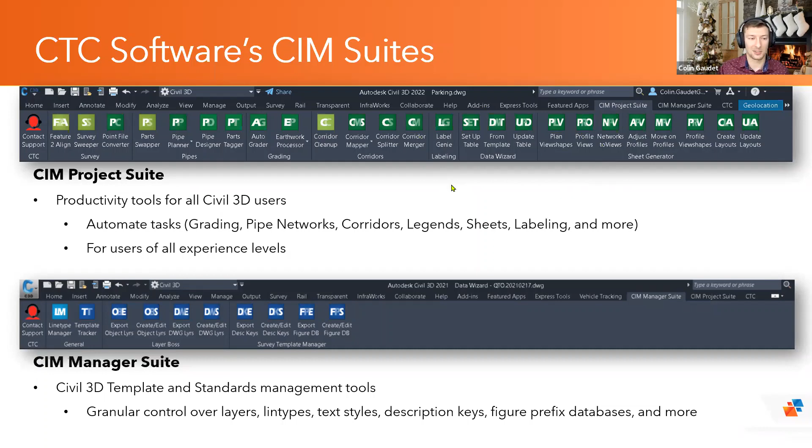There's nothing proprietary about them. Other people can still use the drawings that you have used CTC tools on. They just have to do it slower. All that to say, let's get into some corridor target mapping.

And when we're talking about corridors, I always like to start off at ground zero, talking about corridors as a whole. What creates them? Well, we obviously need a baseline, both vertical and horizontal. So we've got our horizontal baseline being an alignment. Then we've got our vertical baseline being ideally a design profile. And then we've got a typical cross section that's going to run down those in different regions. And that typical cross section is your assembly.

Now, what happens when you have an assembly that doesn't quite fit in certain areas? Well, we end up having to create another assembly that has a sidewalk for these 20 meters or has a driveway for these 3 meters or whatever the case. And we end up running into these issues where we develop a ton of different assemblies. Now, this is a fairly simplistic way to do it. There are more efficient ways to create assemblies because this offers pretty clunky transitions between all of these regions, and you're left with a corridor that's got, I don't know, north of 15 to 20 regions. It drastically decreases the performance of your drawing, having that many regions and everything else.

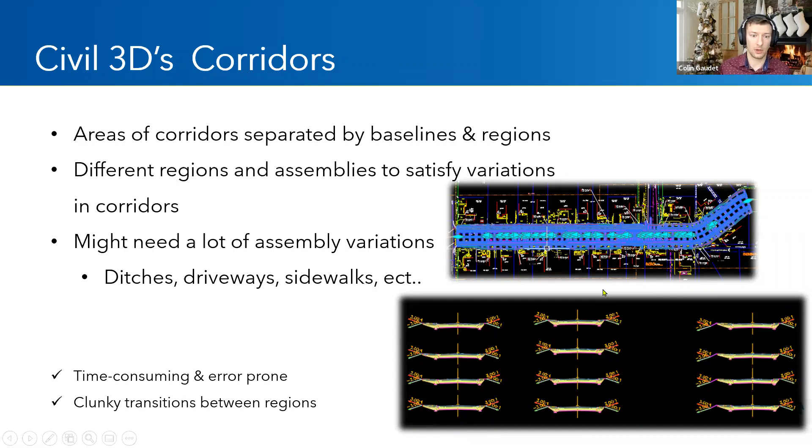So alternatively, we have these conditional subassemblies. There's two different types. There are the cut or fill, dictating what happens in a cut situation when you are sitting below the existing ground, or what happens in a fill situation when your baseline is sitting above the existing ground. That's one conditional assembly. The other one is a horizontal target, a found or not found horizontal target assembly, and that's the one that we're going to kind of manipulate today.

What these simple subassemblies allow you to do is consolidate a variety of these different assemblies that we have here for the different situations into one single assembly that's got a couple different branches with different options involved in it. So that's what we're going to try and work with today.

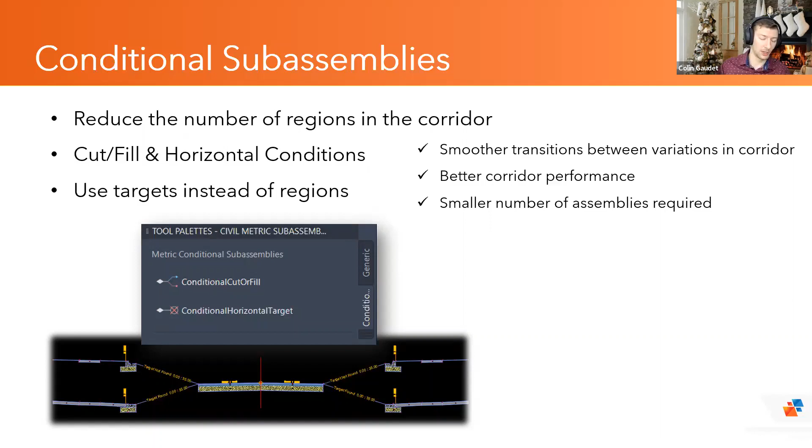Getting into it though, the other kind of sore point when it gets to corridors as a whole is getting into the targets. So your targeting can get pretty clunky because it's 3 dialog boxes deep through your corridor properties. You can assign things by individual layers or individual selection, but those layers don't remain dynamic. So if other stuff gets added to those layers, Civil 3D natively doesn't recognize that more things need to be targeted. So it's still fairly time consuming, and we have to go and do updates and iterations manually.

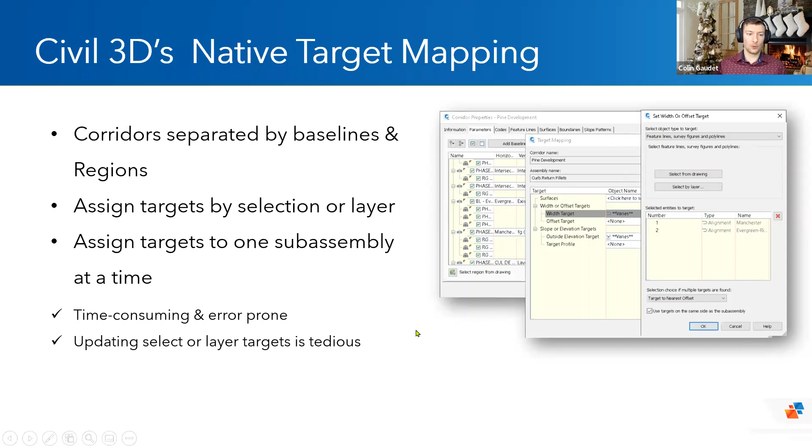For corridor target mapping, what CTC's got instead is our Corridor Mapper tool. So this guy right in the middle here. We'll take a look at the corridor splitter and merger and corridor cleanup, but those are fairly simple and straightforward tools that you can't make an entire webinar about. What Corridor Mapper does is it allows you to get all of your targeting information in one single dialog box.

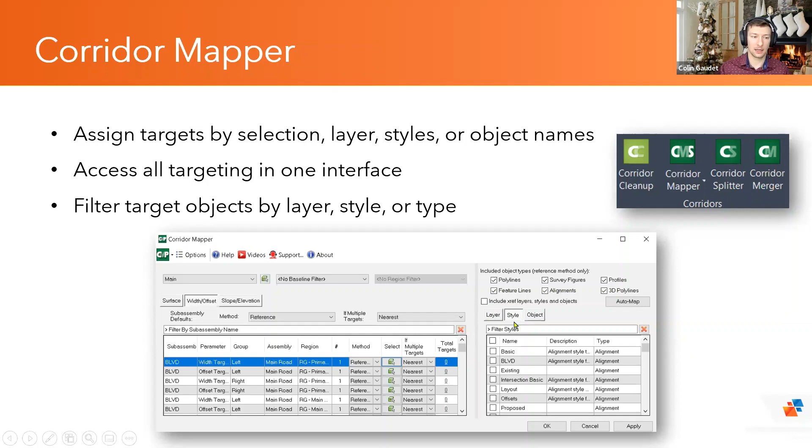We can filter with a variety more options, including filtering by styles and dynamic layer targeting and things like that. We can even target XREFs, and we'll talk about how we can actually mirror the targeting of another subassembly that's in our corridor.

Now, all of this is available with the CIM Project Suite. It's available for the last 5 versions. So as I switch back over into Civil 3D, I could be using version 2018, and I would still have access to this tool set and have the ability to use all of these things in here.

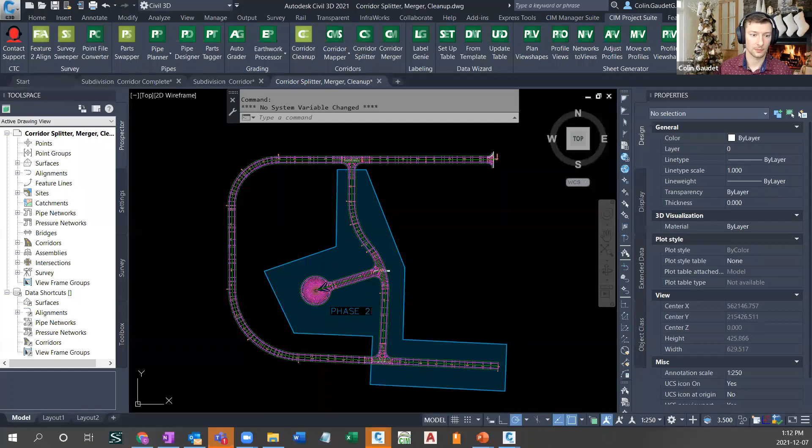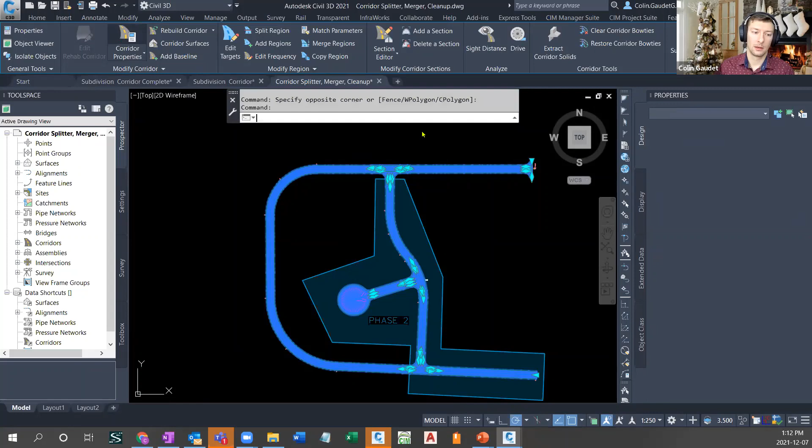Now in Civil 3D, we're going to get into corridor targeting. This is just a quick example of a corridor that's already targeted, because I'd like to show you really quickly the splitter and merger. This is all one corridor currently. If I get into the corridor properties, this could be one huge mess. And I don't want to have to reproduce this if we realize that, hey, we ran out of budget this year and this portion is actually going to be completed in phase 2 next year.

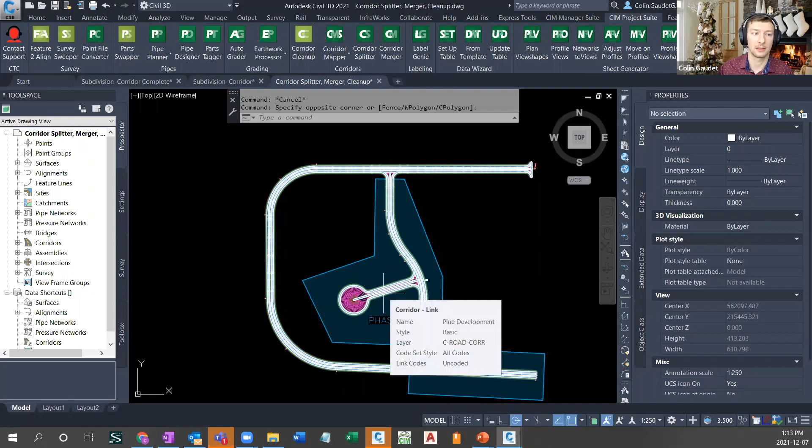Well, instead of having to delete and then recreate this in a separate corridor for establishing quantities and surfaces and things like that, we can simply use corridor splitter. You select corridor splitter. It asks you to pick a corridor and then gives you options to either split off individual, or I can press enter and I get an entire list of all of the different baselines and regions.

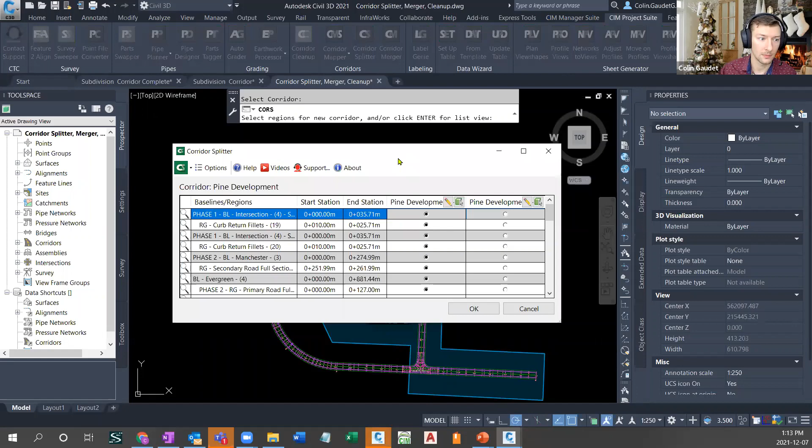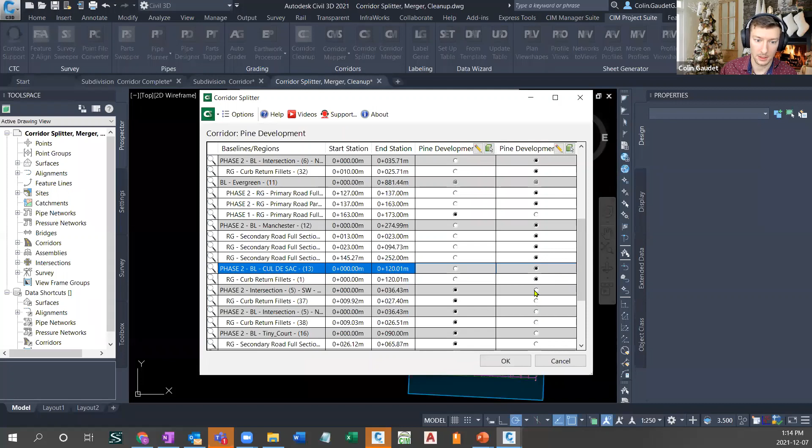And with that, I'm able to come in here and split off phase 2. Luckily I have most of these named right here, so I can scroll down and divvy this up via regions. It's going to copy baselines. It's going to copy and maintain all of the dependent objects. When I'm talking about dependent objects, we're talking about surfaces that are created from this or other things like that. Once you've separated all of this out, we can name each one of these, click OK, and it can separate all of this out for us.

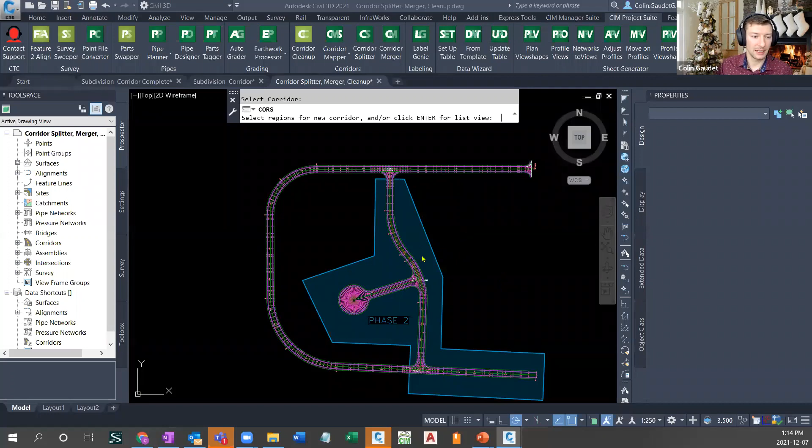Merger does the exact opposite. We pick 2 corridors, and it will merge those dependent objects as well. It'll take a couple seconds, but this is something that's not available in native Civil 3D. We can't simply split a corridor into 2 separate corridors. Now, if I take a look, I've got 2 corridor surfaces for 1 and 2, and everything already in there.

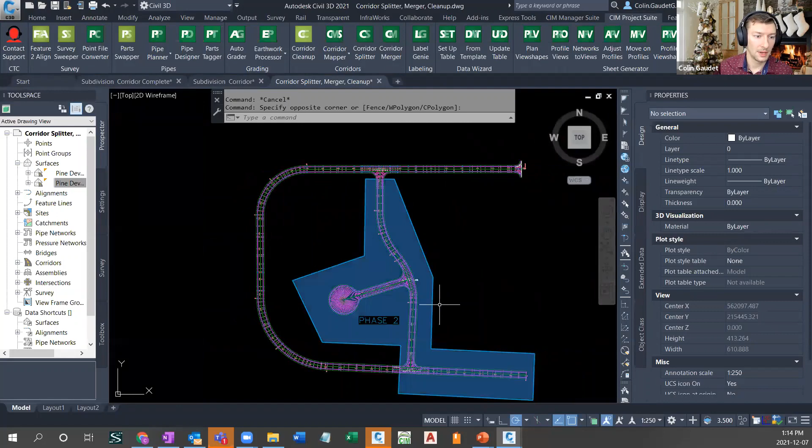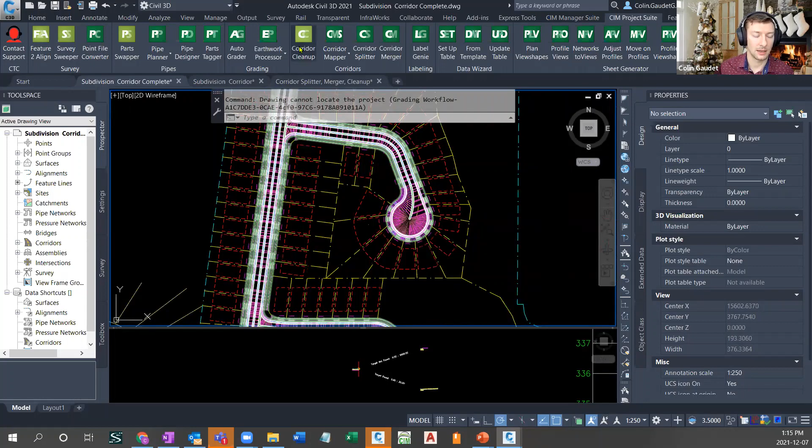The other side of this is sometimes these get pretty cluttered. For example, this is what we're going to end up creating by the end of this: we're going to use this subdivision and create all of this out. Sometimes maybe we don't know what all of this targeting is happening in here, and we'd rather just start from scratch and reestablish everything on our own. Corridor cleanup allows you to do that.

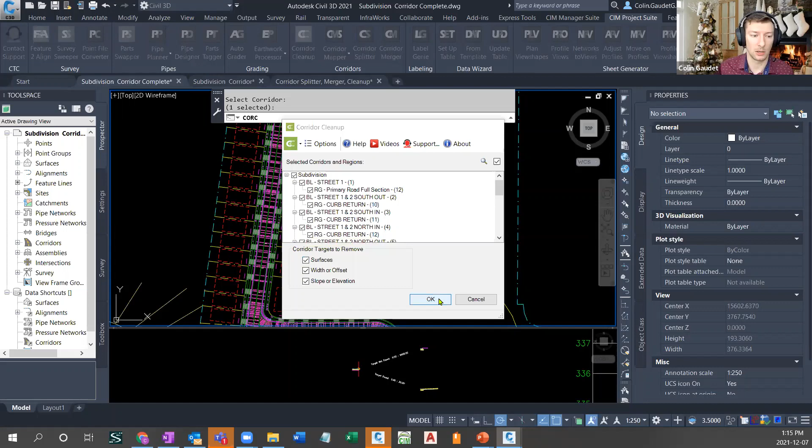Select a corridor, and I call this kind of the nuke button on all of the targeting. You're able to specify specific regions or baselines to remove targeting from, or specific targets altogether, be it the slope and elevations versus the width and offsets or surfaces. Let's just nuke it all and see what happens here. And we can eliminate all of that targeting in there.

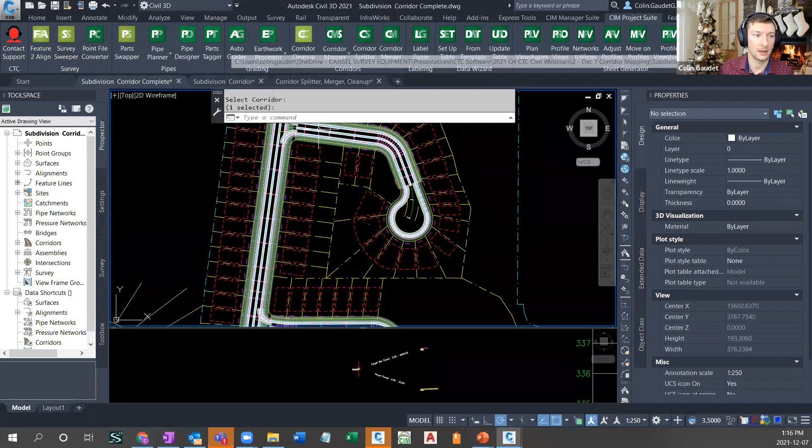Now, I'm not saying this is something everybody needs every single day. That's why it's a lighter green colored tool, meaning that this one's actually free. You don't have to purchase the suite. It sticks around after your trial runs out, and you get to keep that tool, as well as the part swapper tool and a couple little survey unique tools. But it nukes all of the targeting in my corridor.

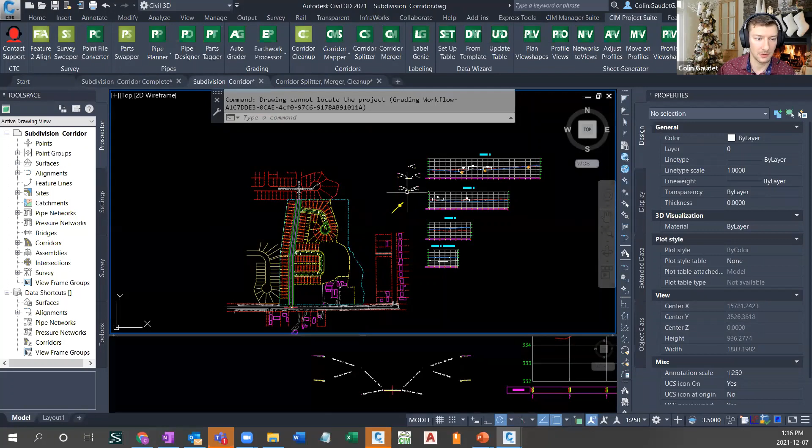Now, that was the completed version. Let's jump in here and take a look at what we're going to create. We're going to develop one corridor for this entire 3-street subdivision using only 3 assemblies. If I zoom in here, I could have done this with simply 2 assemblies. All I need is a curb return assembly and a road assembly, because the only difference between these two is the lane width right here.

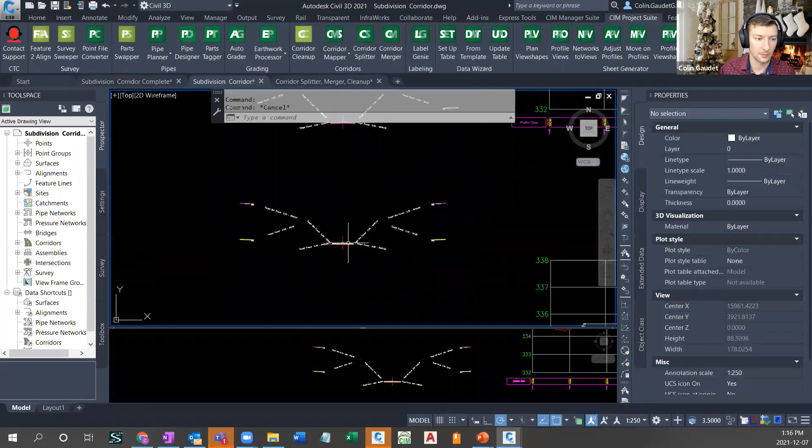Oops. This one here has a 4.5 lane width, and this one here has a 4.75, I believe. Oh, actually, I think it's the sidewalk that's different. My bad. But we're still able to use targeting to stretch those out slightly differently.

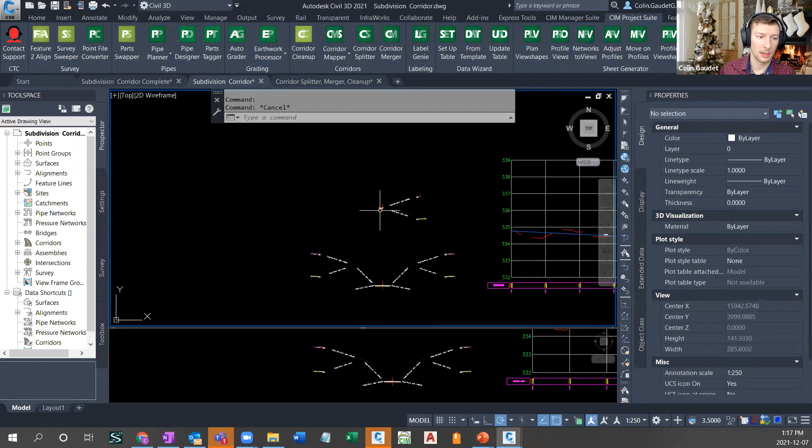Now, if I zoom in on this assembly, I've got these conditional subassemblies, and if I grab them, one point that I always like to hammer home is organization when it comes to your assemblies, your corridors, and all of this stuff. Everything Civil 3D really, organization is paramount. So I didn't just drop these in here as conditional horizontal subassembly. I named them with the intention of what I'm looking for here.

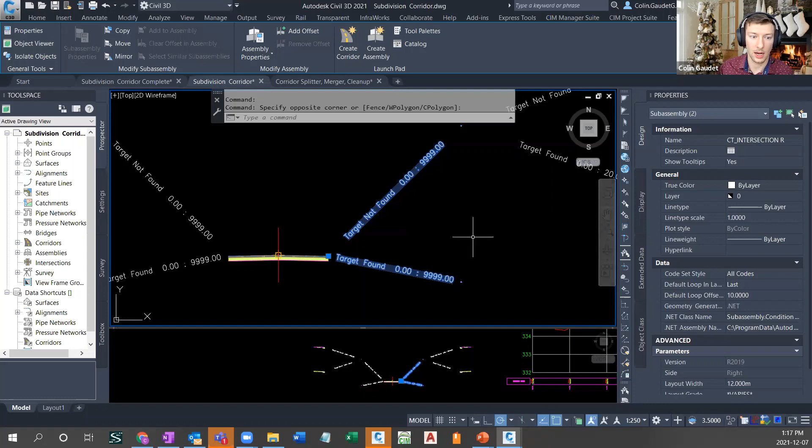So this is my corridor target, CT, and I'm looking for an intersection. So I'm able to use this for my intersections. If I find a simple polyline, and actually I've got this guy down here. If I find a simple polyline like this, it's going to remove the curb and the sidewalk and everything and allow me to develop an intersection in there.

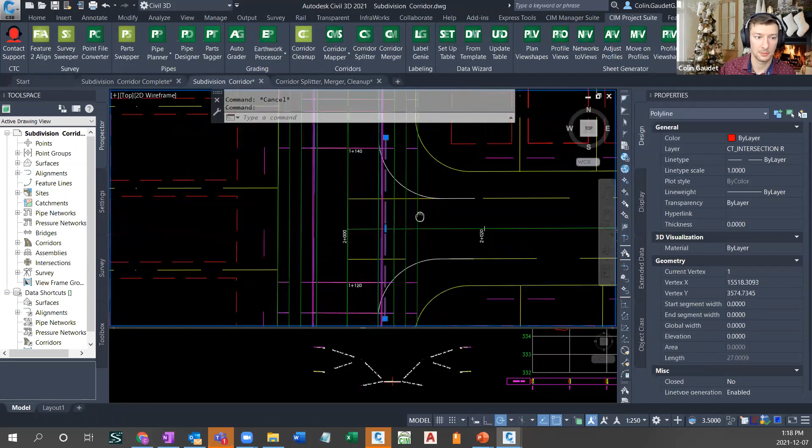Same thing here. If it doesn't find that, then it's looking for the next thing. Target not found, target found. And in this case, I've named it again. We're looking for driveways. So it's actually looking for, on the right side, these simple little driveway polylines dictating that I'm going to need a drop curb and things like that.

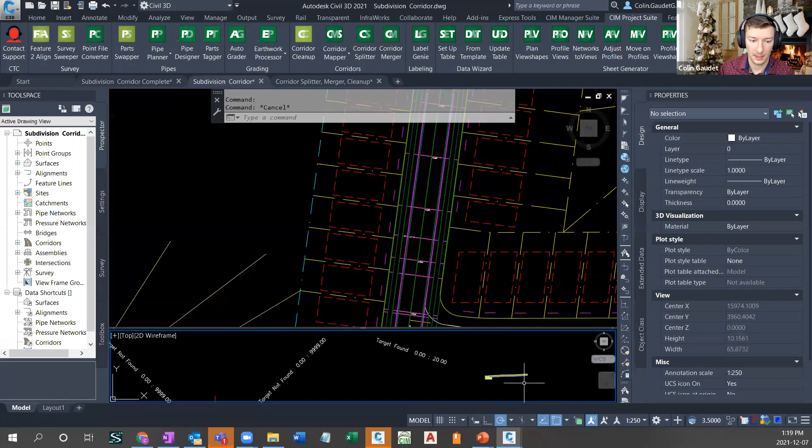And then based on what's happening in each one of these, you're going to end up with a different scenario. Think of this as kind of branches of possibilities in this assembly. If there isn't an intersection, but there is a driveway, I'm going to be left with a drop curb, an apron carrying through. If there isn't an intersection and there isn't a driveway, I'm going to be left with a full curb, a boulevard, and a sidewalk.

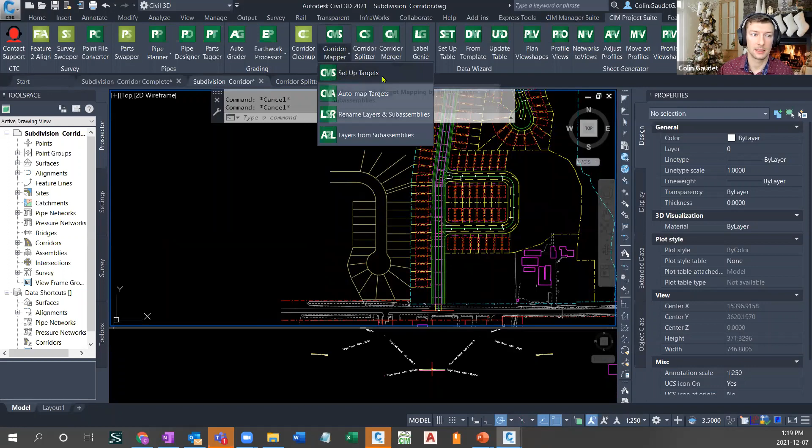So let's take a look at some of this. That's all native Civil 3D right now. What we're going to do is use some native tools to manipulate corridors and develop regions, but all of our targeting is going to happen inside of the setup targets for Corridor Mapper. Let's open that up and we'll start to apply targets to this very first baseline and region for the corridor. So just to save some time, I've added that in here, and I've developed some offset alignments and things like that.

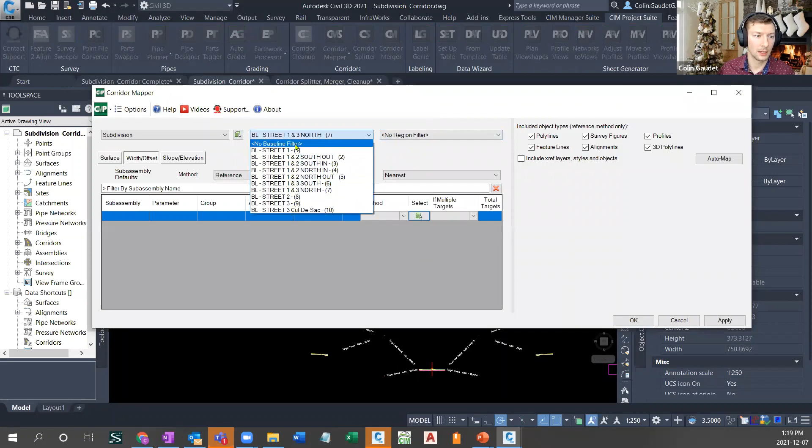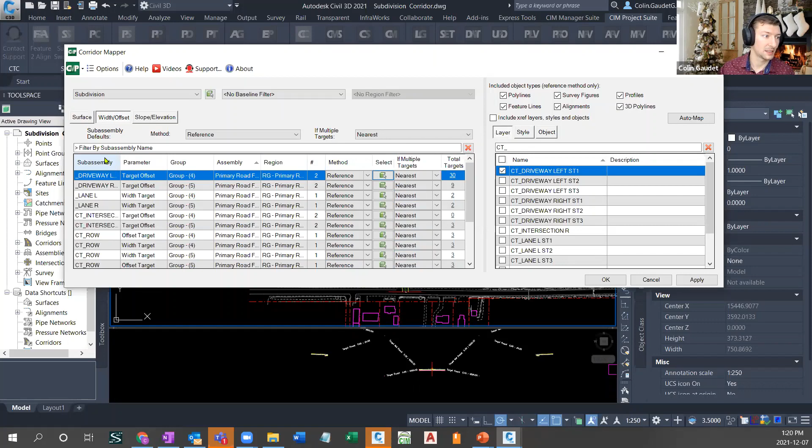Now, in Corridor Mapper, we have the ability to pick the different corridors and then divide up what we're looking for in terms of targets based off of surfaces, width and offset, or slope and elevation. And within here, I can refine this search based off of the different subassemblies, the different baselines that I'd like, and the regions if I needed to as well. But remember, the goal is to reduce the number of regions using these horizontal conditional subassemblies.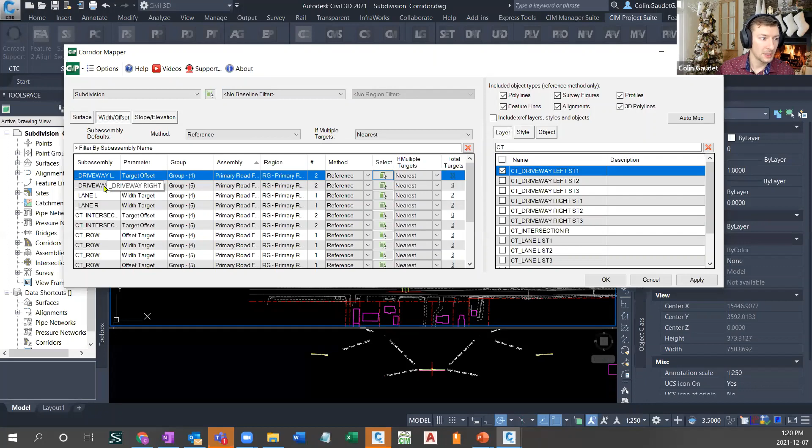Now, I've actually mapped some of this out already on this first initial one. So with one single region in here, I've taken my driveway left and my driveway right, and we can see that I've actually grabbed these via layer. So I've selected a layer. I can also filter out those layers using my filtering options here. And it gives me the option to pick whether I want polylines, feature lines, alignments, 3D polylines, or all of the above.

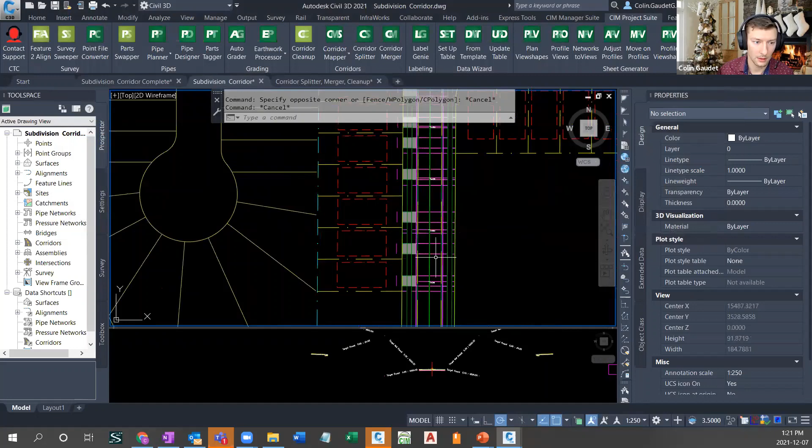So I've filtered all of this out here. Let's click OK to start. And just like that, it's already found 58. And I know this isn't that impressive because this is already baked in. But what we're going to do is develop even more on top of this. So let's zoom in and take a look here. We've got some drop curbs. It's recognized there's an intersection over here using the intersection polylines. And it's also grabbed some more intersections here.

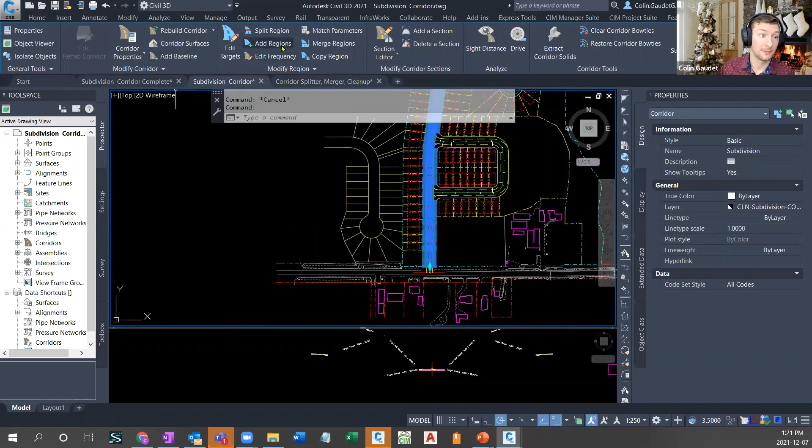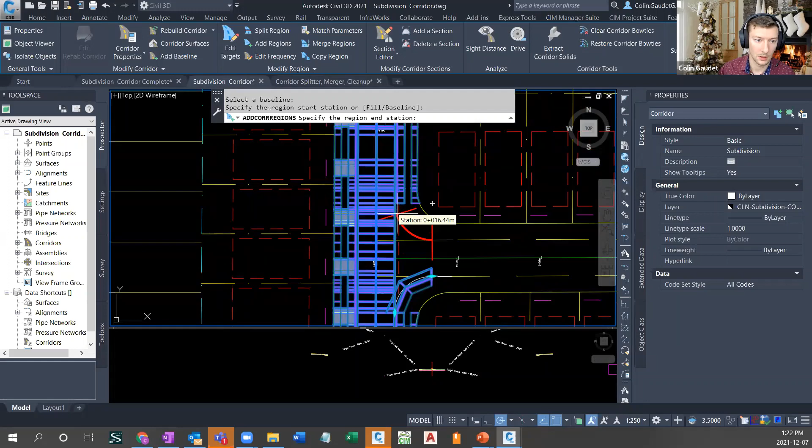So let's maybe add some baselines to this corridor and get a little bit more efficient here. Well, actually, we've added the baselines already for time's sake. Let's add some regions. So I'll come in here and select this region and develop a curb return right here. Now it gives you the option to do targeting. We're going to do all of our targeting inside of Corridor Mapper. There we go. We've added 2 there.

Just going to click enter and then enter to re-execute. Pick my baseline, pick the starting point, and pick the ending point of that region. And I've already got my curb return assembly picked. Select one, the start of the curb return, snap to the end of the curb return, and keep going.

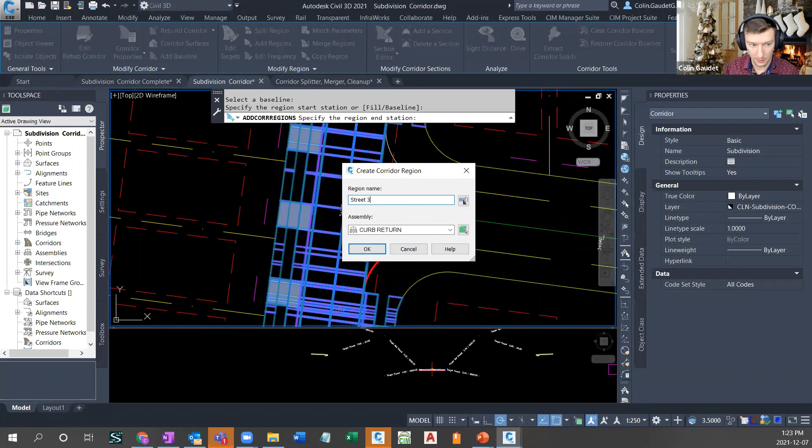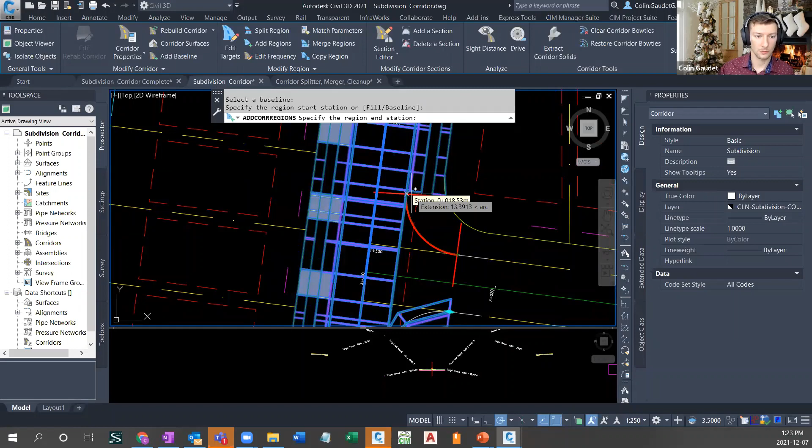And we'll do a couple more up here. 1. And this time I'm just going to name this one slightly differently. We'll call this Street 3, 1 to name my regions. And I like naming my regions so that I can tell them a little bit apart when I'm looking in my targeting options. Select here, carry along. Come on, Civil 3D. And we'll go to there. 3-1, let's go 3-2. Okay.

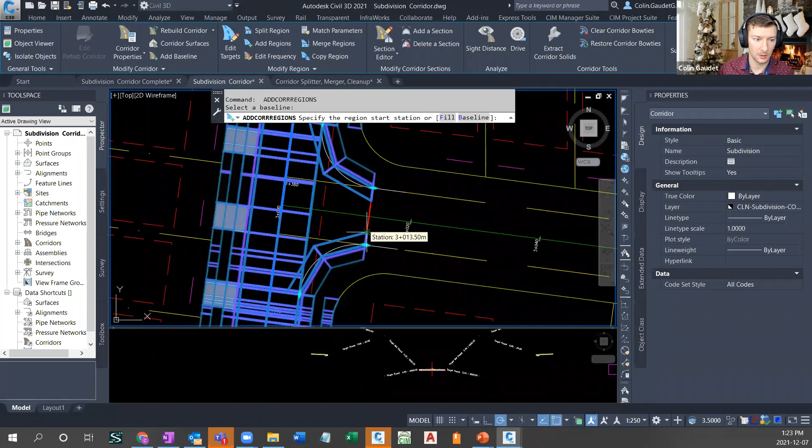Perfect. Now, actually, I'll add one more baseline here just to keep things moving, because we're going to add for Street 3 as well. I'll put it over here. Assembly name, next counter for the name. Looks good. And we'll use that secondary road. Click OK, and I don't need any of the targeting.

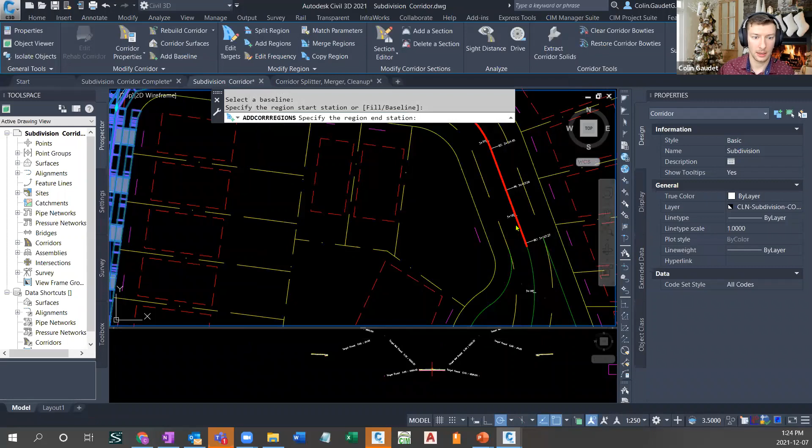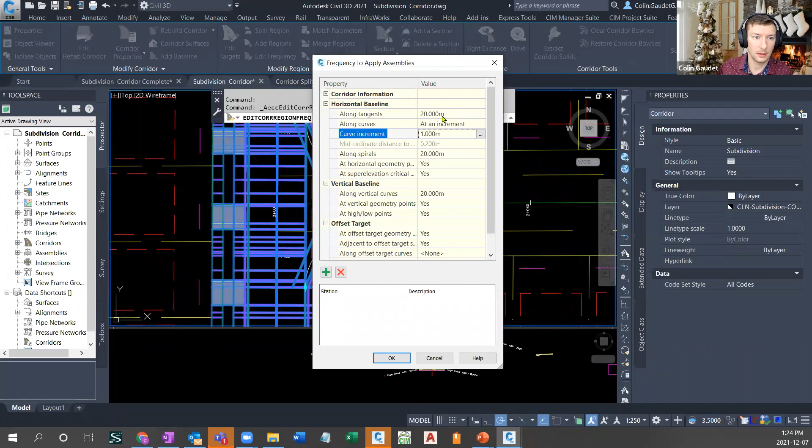Now, the first thing I see about all of these regions, my frequencies are junk. None of these look like proper rounded corners. So the fast way to fix that is to create all of these regions right off the hop, then come in here, edit the frequencies on 1, edit my curves, so that goes to 1, edit these guys, so maybe that goes to 5. And that looks pretty nice in terms of frequency.

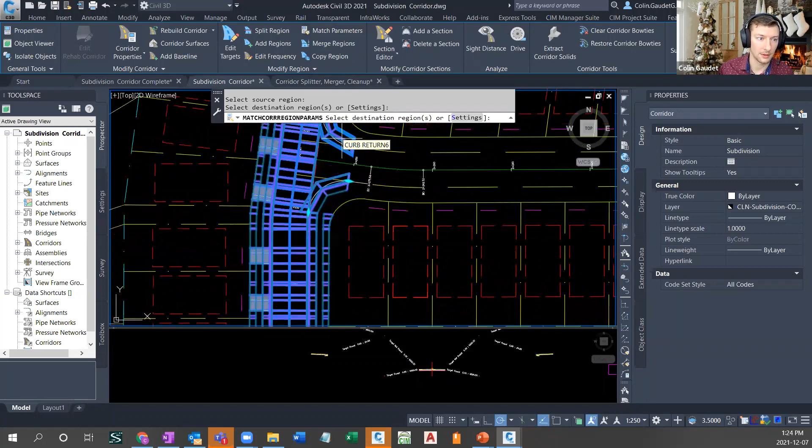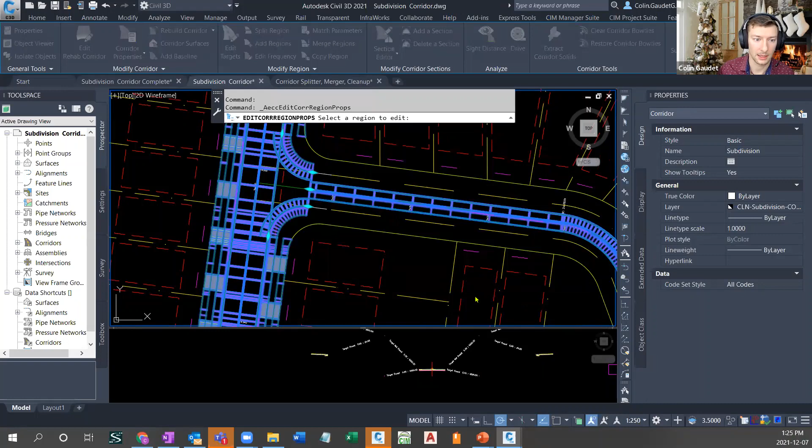Now let's come up here and match the parameters for the regions. I'll select the region that I like, and then I'll match that to this one and all of the others. 1, 2, and I can even match it to 3, 4, and Street 3 right here. And we can apply all of this. Oh dear. We used the wrong. It accidentally swapped to the wrong assembly. Let's put that back. But it'll still keep the frequencies for us. Perfect.

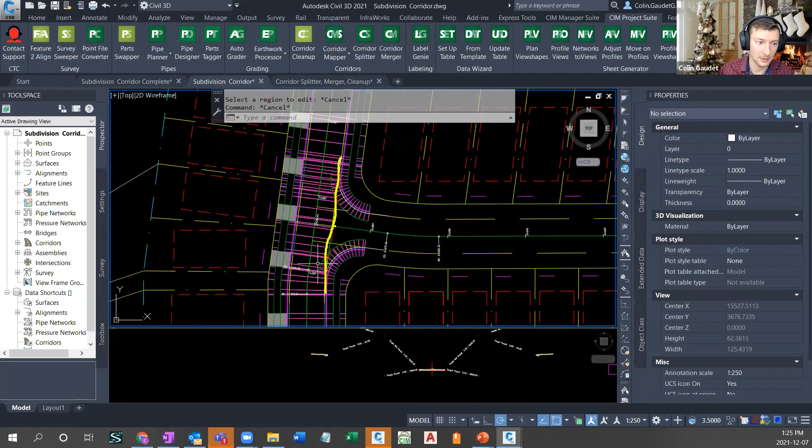Now, these don't look that great. Let's come in here and address the targeting to make these intersections work. Now, if I take a look at these intersections, I need to target the offset alignment on Street 1 right here. And I also need the center line alignment along Street 2 and along Street 3 up at the top there. So let's apply those sets of targeting. I'll go Corridor Mapper and select my corridor.

Now I've got a lot more stuff in here now, but I know that all of those intersections are using my curb return. And not only that, I'm not looking for the driveway right option. I'm looking for the lane option. So lane, curb return, and this shows up in the right place here. I can select this one subassembly, and I can apply layers. So I'm going to search for center line of Street 2. And that's going to apply a target right here.

If I select this total targets, it's going to show me what it's actually grabbed. It's grabbed alignment Street 2 for a width and offset target. That's excellent. Now I can continue to add more though. So I could maybe go to styles, and I know that I've got an offset alignment style right there. So I could check that off, and now I've got 3. I've got my left and I've got my right alignments for Street 1. Now that's okay.

Now that I've got that all set up for one of these curb returns, I can use the mirroring options by grabbing the other ones. I'll shift select. And instead of using reference, I'm going to use mirror for these 3. Then it gives me the option of what other subassembly would I like to mirror. And what this does is anytime I were to change any of the targeting that happens on this subassembly right here, it's going to reflect that on all of the other ones. Notice they don't have any targets right now, but I can come up here and mirror curb return 3. I'll check that, and I immediately get all 3 targets.

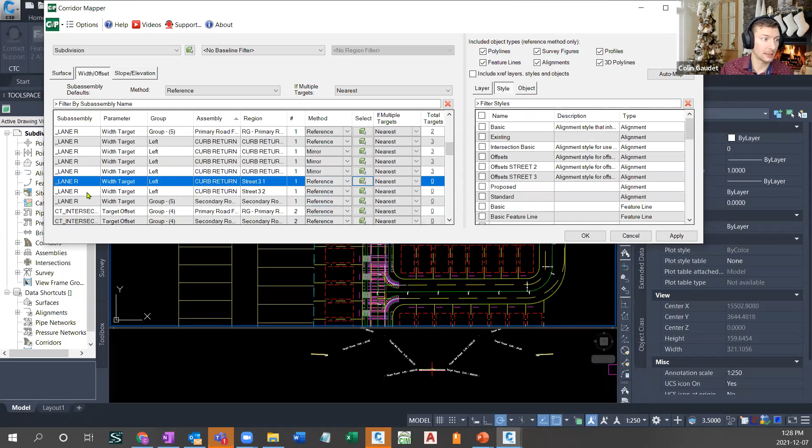Now that's one option. The other option is I can shift select and grab both of these ones for Street 3. I can apply the offset and then go search those layers to get center line for Street 3 right here. Let's click OK. It's going to tell me that now I have 76 targets in here. And let's look at what we've created so far. Awesome.

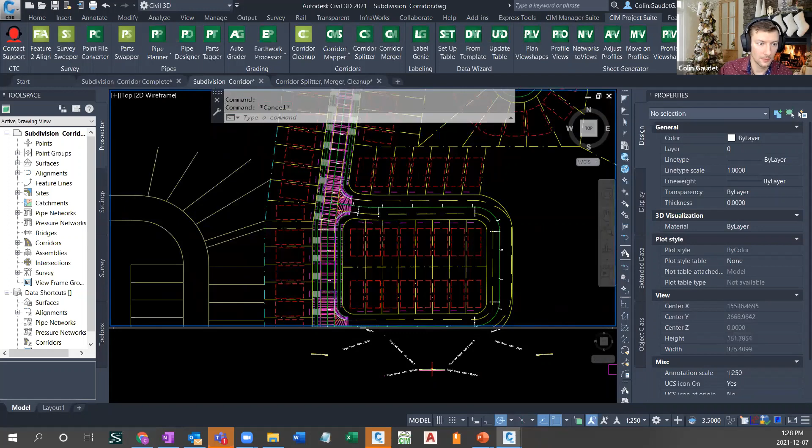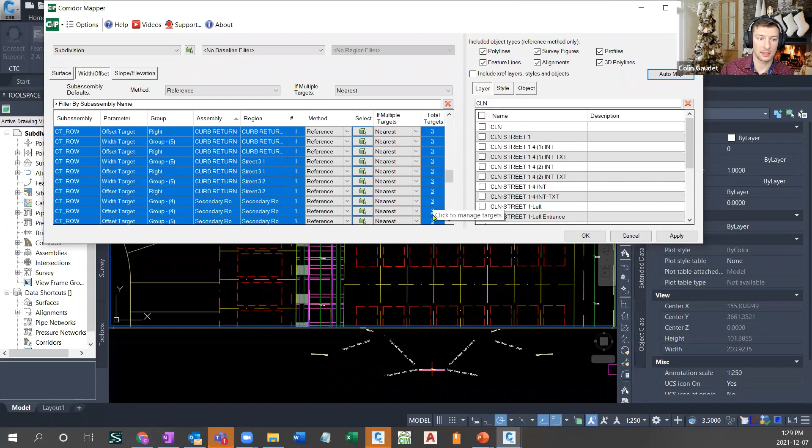Now, I'm still messing up right here. I'd like this to tie into my edge of right of way. And notice that this is sitting on CT row. What's interesting with that is if I go back into my corridor mapper, select my corridors, if the layer name matches my subassembly name, I can simply select and shift select to grab all of these ones here. I don't even have to find that layer. I just click Automap, and it's going to add those targets to every single one. What exact targets did I add though? Well, if I click right here, I can see that I've added 3 polylines.

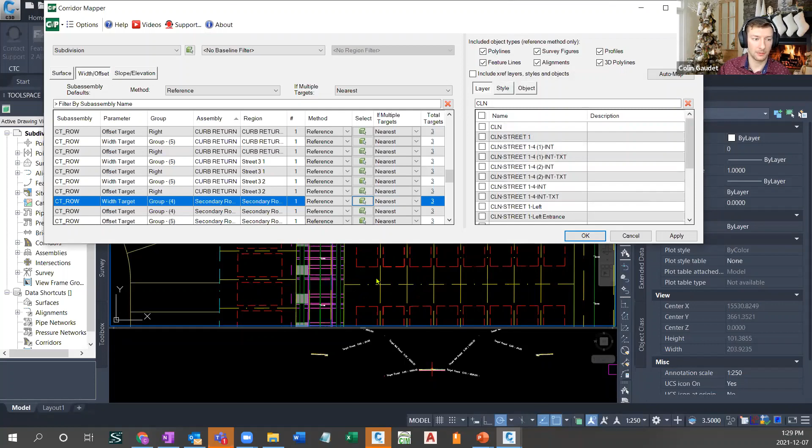So because I took the time at the start to rename all of my subassemblies to match the layers, I've gotten a lot faster of a result. I've just added another 50 targets. I'm going to click OK. It's going to update all of these. And now it's tied right to the edge of right of way here.

Now, I have a sidewalk coming in here and it ends. The reality is it's going to be a lot more difficult for me to map this in the corridor than it is for me to simply map it with maybe feature lines when it comes to the drop curbs and tactile plates and mapping out of the sidewalk in these curb returns.

So instead, what I might do is just come up to my curb return down here, grab this subassembly, and I can choose to omit the link here, meaning that it's not going to create the surface in that area. So I don't have to fight with the surface in that area. It just won't add it.

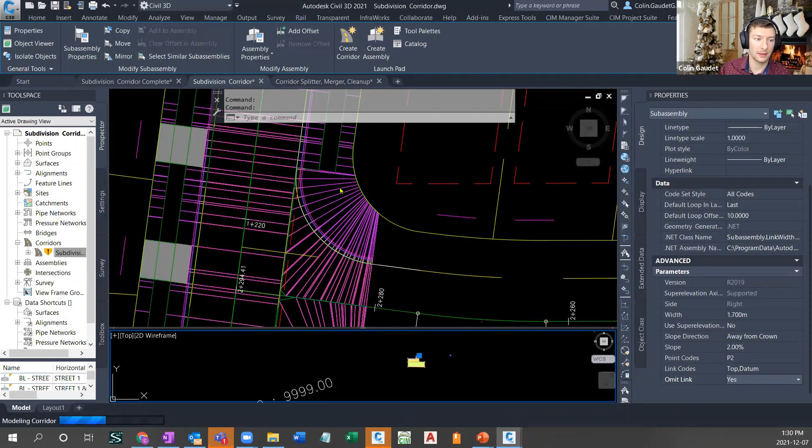If I select yes, and then come over here and rebuild my corridor, it's going to omit the link anytime that it's using that section. So now I can just simply map this with feature lines in here as to where the sidewalk needs to go. This I find is a lot easier to go through.

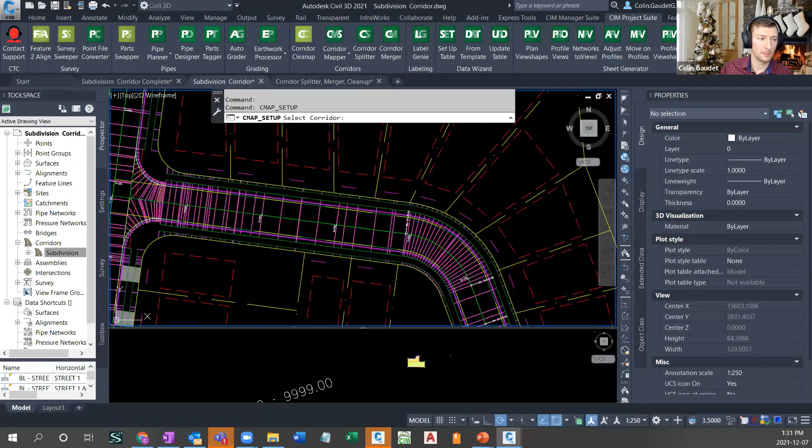Now let's focus up here a little bit more. Looks like I've got some things working up here, but I don't have everything working. So I'll go into my corridor mapper. I'd like to add those drop curbs. And instead of kind of fighting through the clutter here of all of the different subassemblies, I know that I just want to work on the baseline street 3.

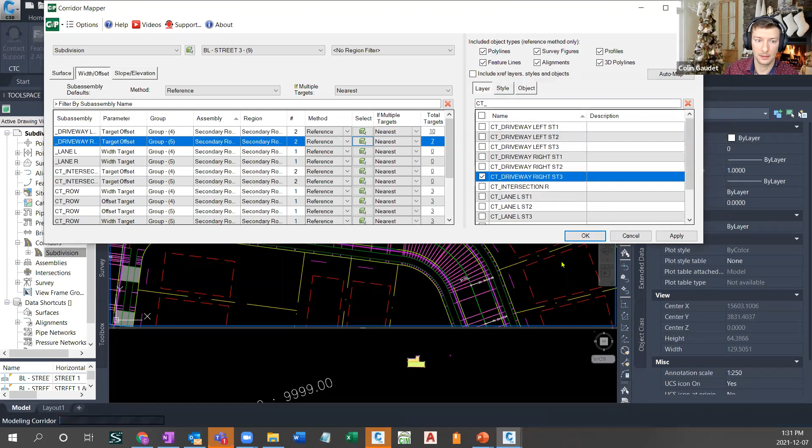So I'll take that. And then I can come up here and find my driveway left and filter to my corridor targeting layers, CT underscore. And I can find my driveway left for street 3. I automatically just added 10 right there. We'll do the same with right. We'll add that in there and click OK. I've added another couple targets. It gives me that summary, and we're going to rebuild that corridor.

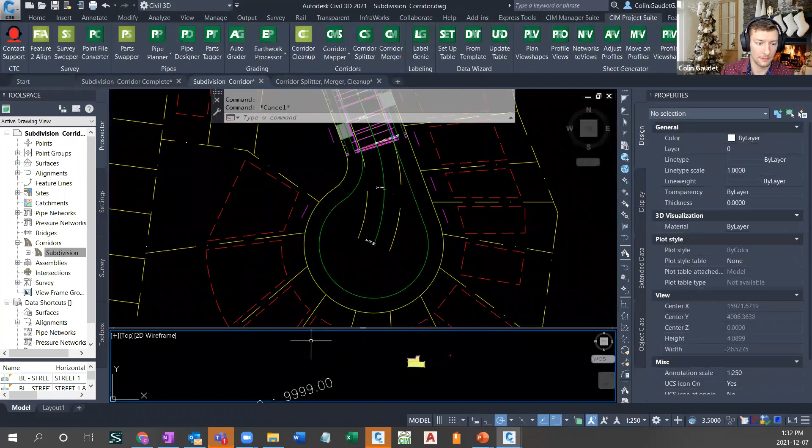Now, let's take a look at a cul-de-sac. With this cul-de-sac right here, and I'm going to move fairly quickly because we're a little bit rushed on time, I've got an alignment. I've also got a profile. If I zoom out here, the cul-de-sac profile. It's very simple. It just peaks at the furthest point to make sure that there's flow around the curb out towards the street.

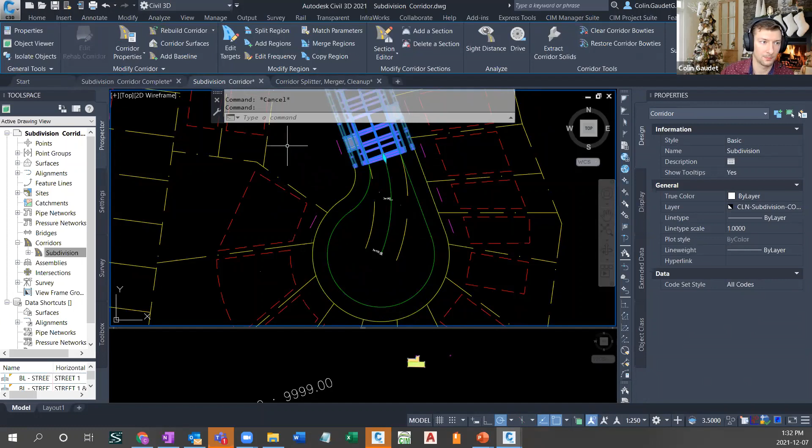What we need to do is grab this and apply a region around the edge of travelway here. So I'm going to add a region along the edge of travelway because I've already added that alignment and profile as a baseline. I'm going to start from 0 and go all the way to right there. I'm going to give this the curb return, and we're going to click OK.

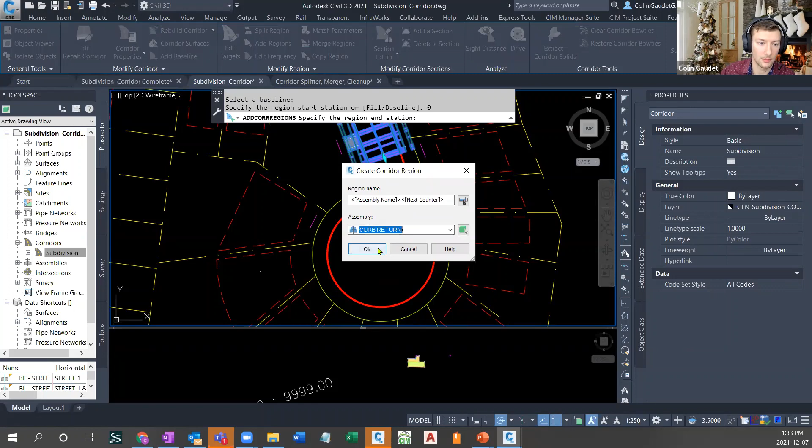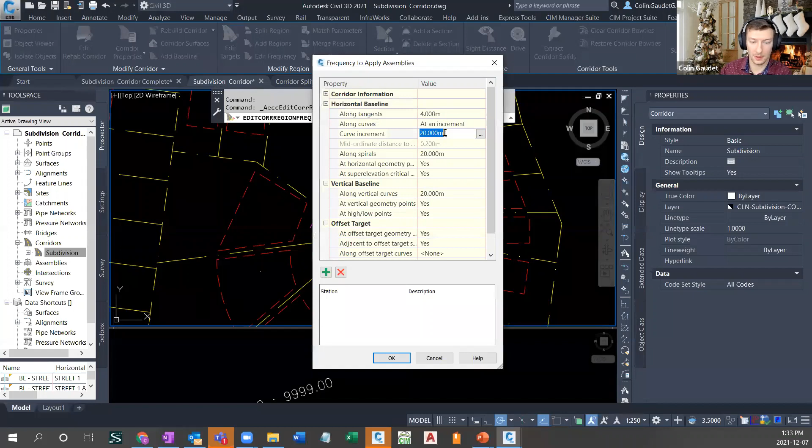Now there's a couple things of targeting that we could do. We're not going to worry about that yet. And wow, that does not look good. But we've already fixed some of this in the rest of the corridor, right? So first things first, let's get the frequency under wraps. Let's maybe put 4 for the straight lines and maybe 1 for the curves. And that's going to start to look a little bit better already. Nice.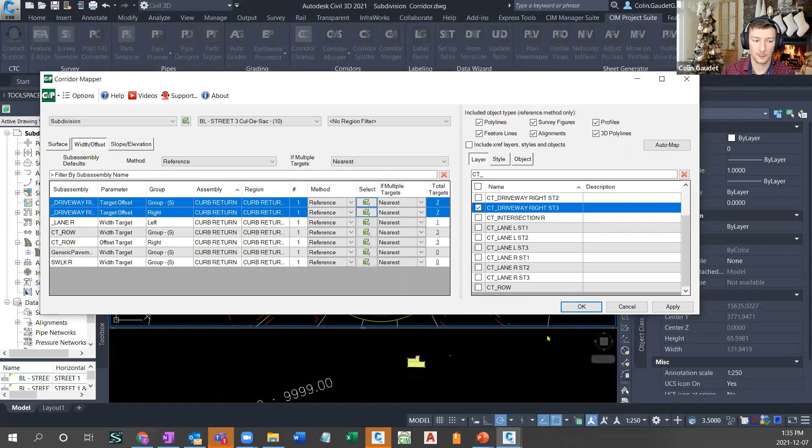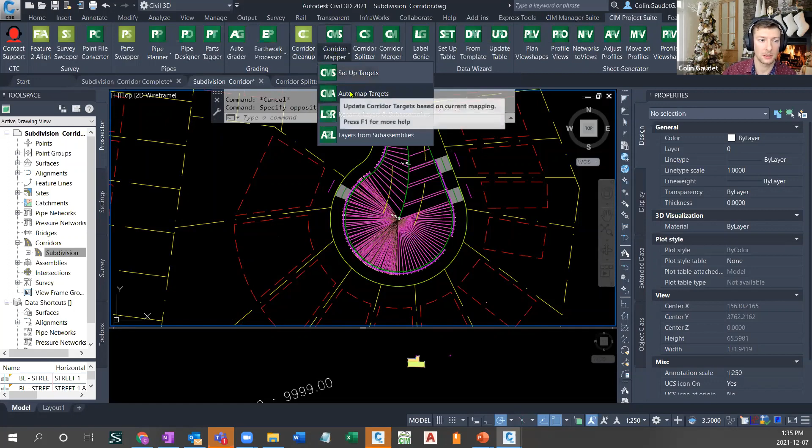And we've developed this out. And it's also respected every time that it sees one of these polylines, it's added in the apron for us. The rest of this, it's left because it is still mimicking. It's leaving that link alone. Now, the beauty with this targeting though is if we've already targeted things, we have the option to just automap targets or update the target layers and things like that that we've got already.

So let's maybe add some driveways around the last of this just to finish off. And I'm going to do that sort of unique way here. I'm going to grab this based off of, come here. Let's go shift select endpoint. We're going to grab it based off of an array right here.

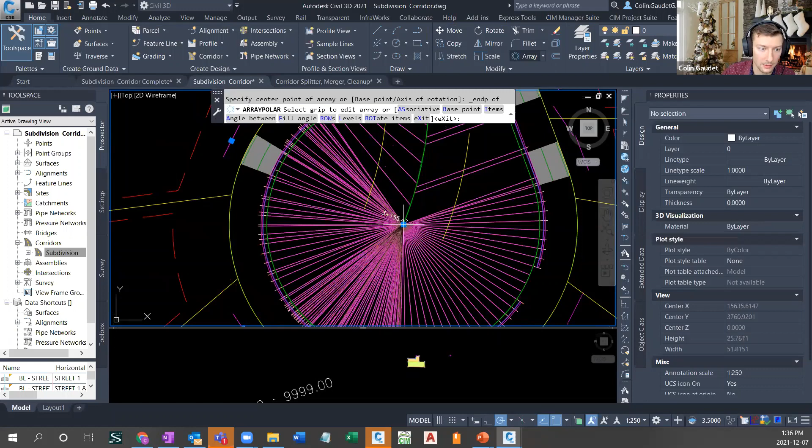Headphones just died.

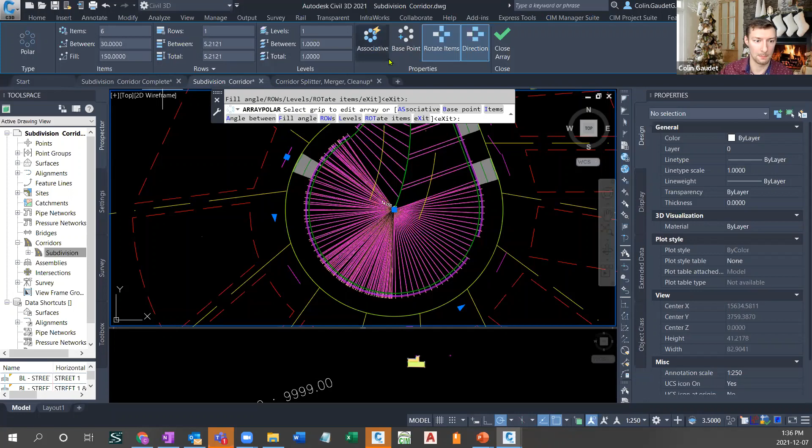Let's continue on here. Now, with that array, we could put this back to maybe 30 between everyone. Okay, that didn't quite do it. So if I stretch this out, I'm running into some issues. So let's try maybe 28. Well, that looks good. It's falling between each of the property lines.

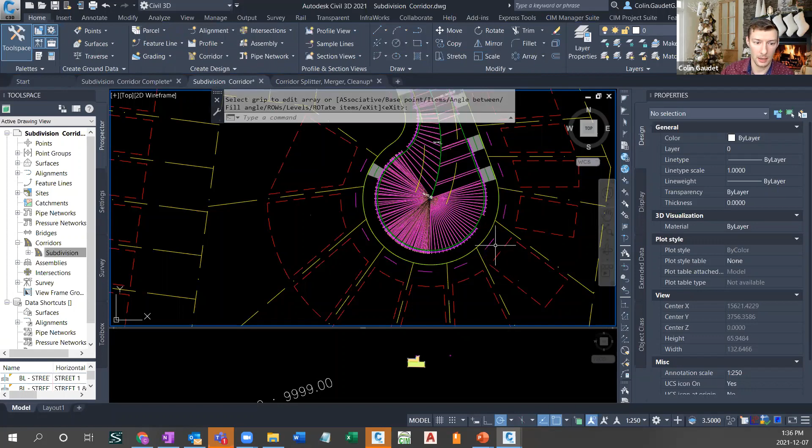Let's do that. All I have to do is just make sure that this isn't associative, so it's leaving me with a bunch of copies in the right place of that polyline. We'll close and click OK. And now I've got a whole bunch more target options in here, all sitting on the correct layer. So all that would leave me to do is I just have to update those targets along the cul-de-sac baseline.

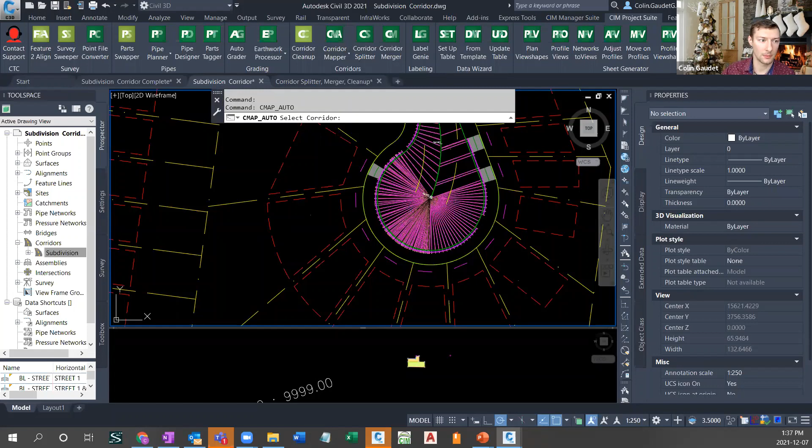So I'll come here, I'll select Automap targets. I'll select the corridor. It's going to tell me, hey, we found a couple more. Let's update these. And then it's going to process that out, find the additional polylines that I've added, and add them in as new drop curbs.

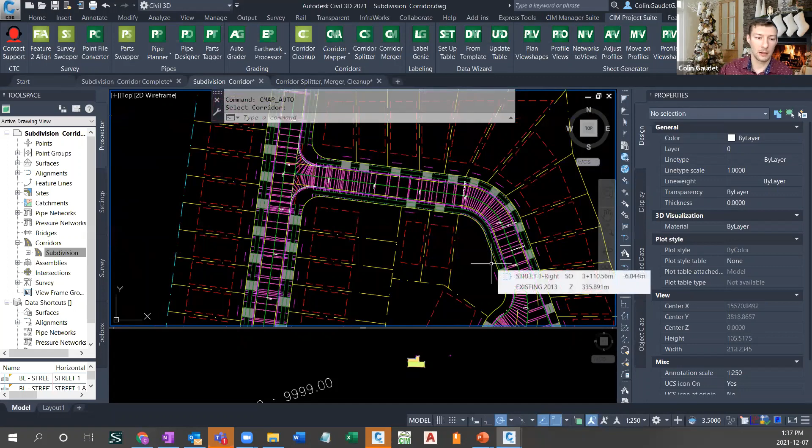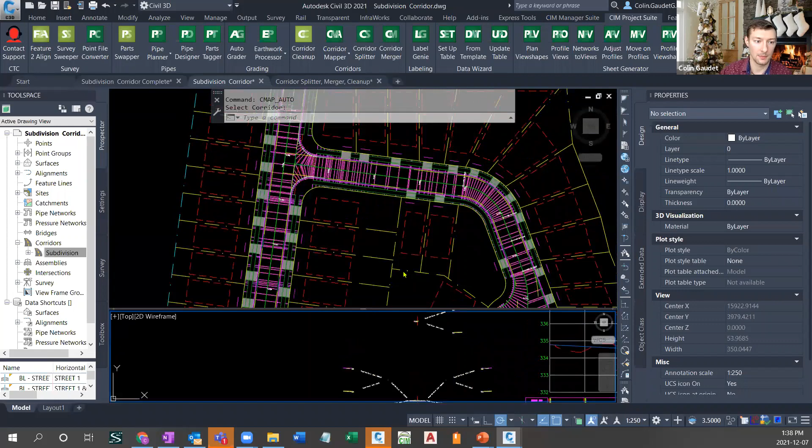So Corridor Mapper requires you to be a little bit more organized with your assemblies, but I would argue that that's a good thing. In this case, we had one region for each road and one region for each curb return. It makes it a lot easier. And now we're just left with 2 or 3 different assemblies and using the targeting to get our transitions between different variations, whether there's a driveway left or a driveway right. We're able to define all of that using targeting, and it's going to leave us with a lot nicer transition periods in between those different scenarios.

So that's some of what this tool can do, or most of what this tool can do. And the beauty of it, like I said, is this is available in the last 5 versions. So 2018, 19, 20, 21, and 22 all can use this tool to manipulate your corridors.